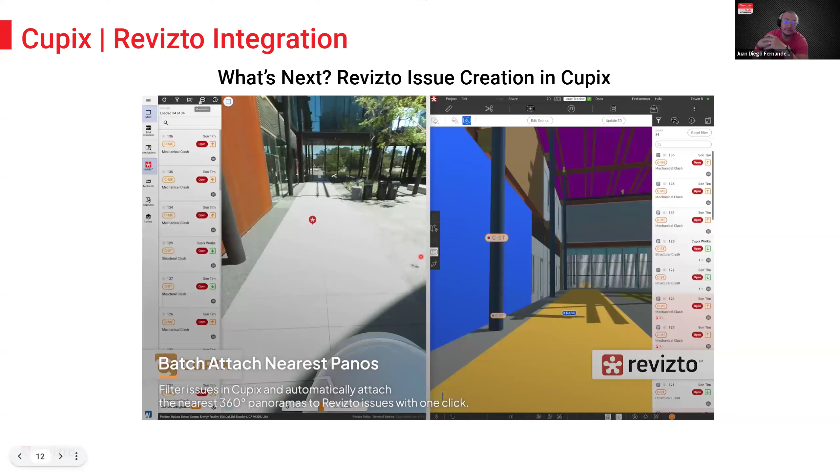What I really like about Cupix is that it offers a good solution for high-paced projects, because sometimes you don't have a lot of time just to survey data. That way, if you're just walking around with your 360 camera, that will give you a lot of information, and I feel like that's really useful. So what you're seeing here in this video is kind of like the integration that Cupix has developed.

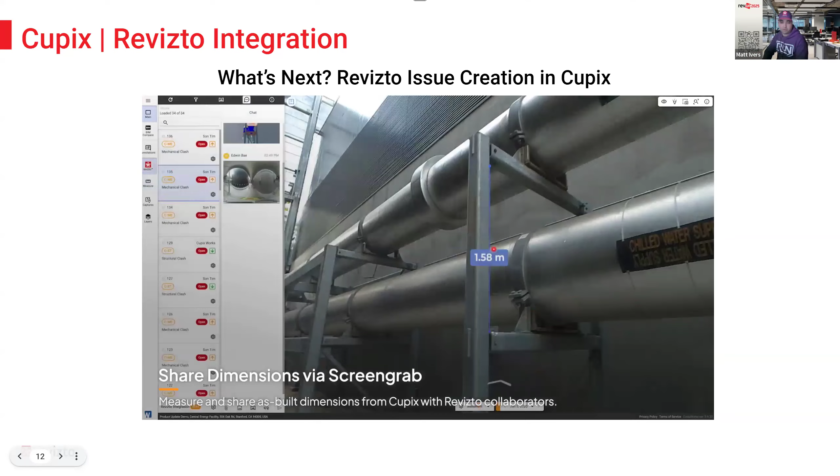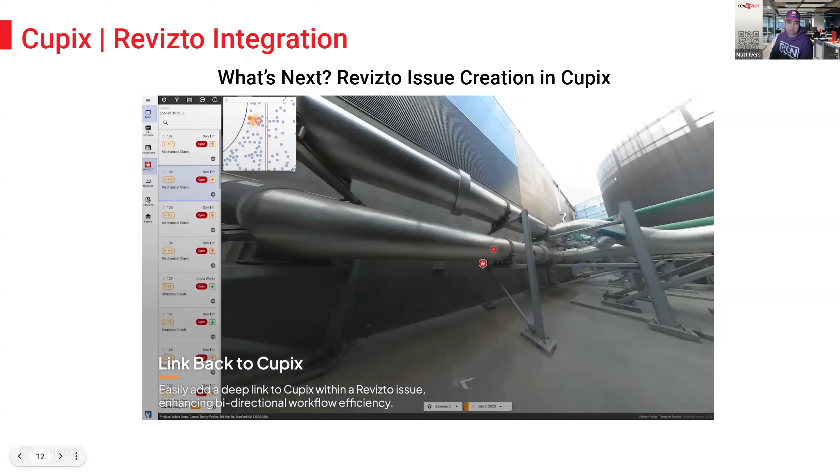Wow, these are the first people to actually develop this true integration, where you can bidirectionally create issues between either platform and sync them back and forth. So imagine being out in the field and you see a discrepancy that the VDC team didn't catch. You can communicate that data from the field right back to the office. In Revizto, a great coordination software, everyone can see the models and drawings, and now they can see the field issues instantly. Then they can comment back and send it to the field, since the field is on site documenting all this information. There's a great bridge now with that integration to basically batch attach the 360 panos of the issues right back into Revizto, so the VDC team is up to speed with what's currently going on. The collaboration is really strengthened between the office and the field.

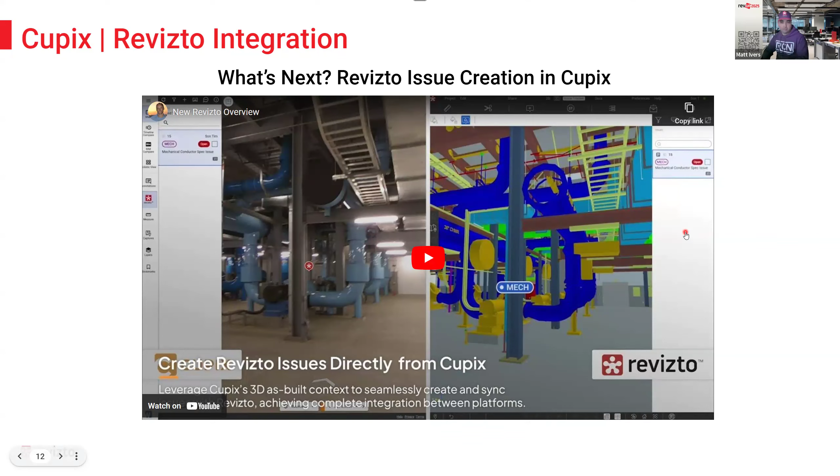Very excited. Awesome.

Moving on to photogrammetry. This has been around for a long time, so it's nothing really new, but it has gotten better at accuracy, quality, and the amount of data that can be captured. You've got companies like DroneDeploy and then DPR using a lot of their software on the processing side to really capture these massive sites. It's a really powerful tool for large site areas, for site logistics planning, excavation, and earthwork.

The main thing I want to emphasize is how relatively inexpensive it is. Anybody can use their cameras, a phone, or Matterport, but drones are really how you document those hard-to-reach areas and large areas you can't walk and capture with just a normal phone.

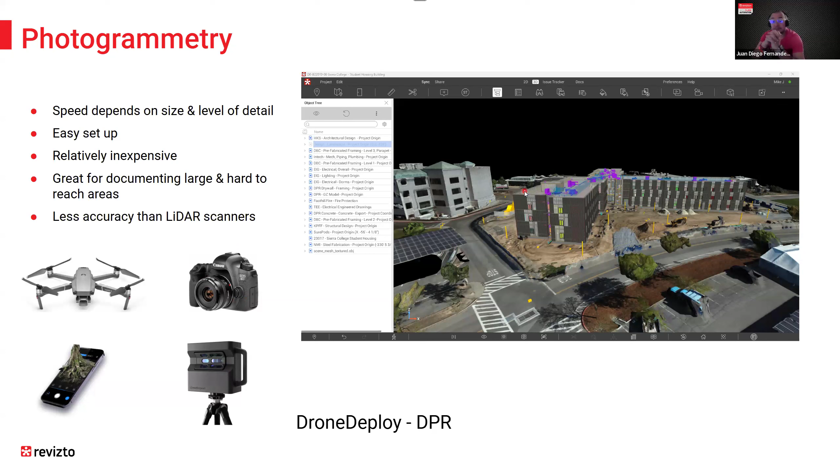What I'd add is that with photogrammetry, it's a really friendly process. All you need to do is take pictures. In the case of drones, you rely on a flight pattern, but nowadays technologies like DroneDeploy offer that based on the extent of the area you want to survey. They take that point cloud and offer a suggestion of flight pattern, so everything is pretty much solved today. That's pretty cool, it's a really nice time to live our lives now and work in this.

Yeah, everything's becoming kind of autonomous, you could say. Now they even have technology where the drone comes out of a shell, like it blooms out of a flower. You don't even need to be there, you could set that kind of like an alarm. It goes off, it opens up, it takes off, flies its pattern, and comes back and recharges. There's just too much technology to talk about, but those are huge benefits, you can't always be on site. The algorithms and the AIs are doing some serious advancements with this technology.

I just want to emphasize the quality. You could see DPR using this to verify that their trench work is correctly located, and you could see that overlaid in Revizto with the actual model, it's just a visual inspection. And then once it's been buried, or once all that pipe work is installed, you can obviously capture that too. So this is all earthwork.

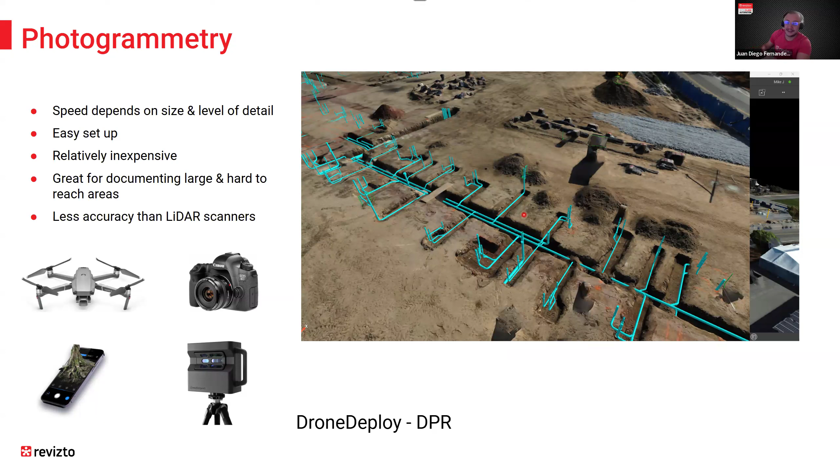Something I really like is that it's so quick, because flying the drone would take you like 10 minutes, processing that data would be another 10 minutes, and uploading that to Revizto means you can go with that information fresh out of the oven. You can start telling the operator, or whoever is managing the site, information in real time, let's say, on the field, on the site. So that's a few of the workflows that I used to do back in the day.

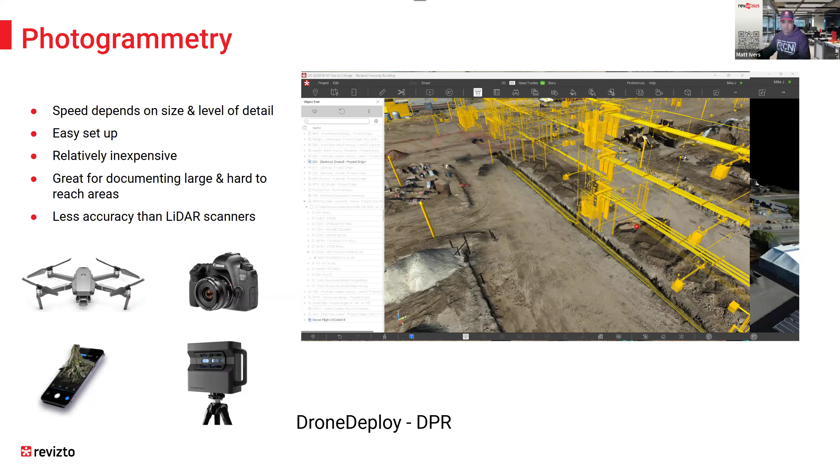This is again a lighter weight option - we're going to get into scans and laser scans, but this is photogrammetry, which is very lightweight. It's an OBJ mesh or FBX, so we can import either of those formats, and they are high quality textures that come with those meshes. It's a low price point of entry, and it works really well with a lot of software.

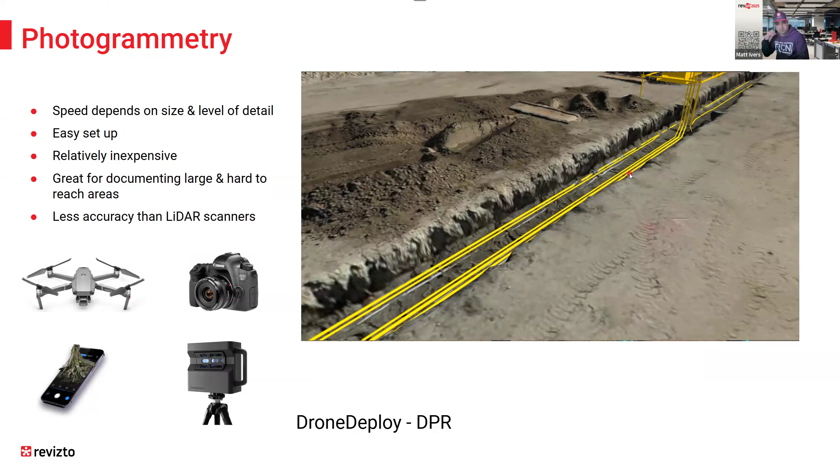Again showing that level of detail, you can kind of see that there. But this is just a fast way to capture large areas.

All right, so moving on, we're going to talk about some LiDAR scanning. This is JTM Construction, which huge shout out to JTM. They're a huge partner with Revizto, and we really like what they're doing. James and Morgan and Knight Davidson over there, huge help putting a lot of this together.

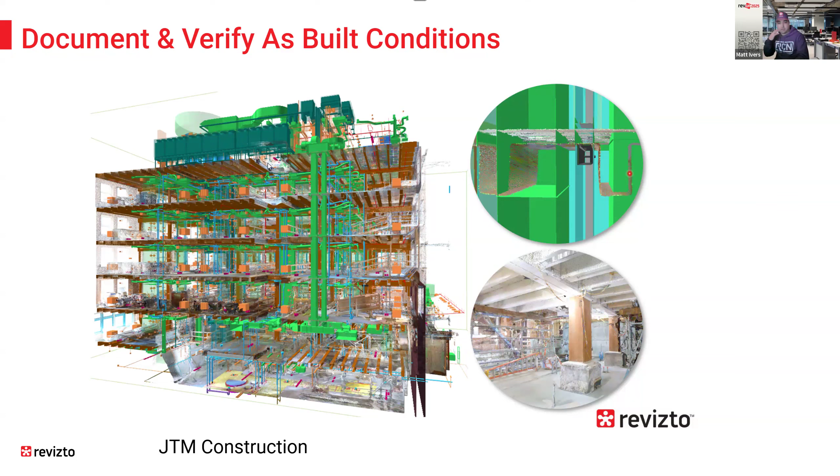They really do a great job with their surveying team and then with their VDC teams out there to capture really any of the existing spaces, any retrofit work. They also use it for a lot of pursuit work because it's very fast to be able to consolidate all that information and show it in Revizto.

So why do they do that? Obviously risk - we're trying to mitigate risk as a GC. They carry a lot of risk, so we want to make sure what we're installing is absolutely correct. We also want to verify what's existing meets the intent of what's designed. Because remember, the design team is going to design based on a lot of things, and there are assumptions that have to be made. They might not have access to the scans, so they've got to go off of older drawings. And with that, obviously, comes that margin of error.

So what you're seeing here is the design model being compared against the reality that was captured of this existing hotel in Seattle. You can clearly see where those design variances are. It's very easy to do that, mark it up, send it back to your designers, and then just confirm that, yeah, that beam is in the wrong spot. We'll update the model and then move on.

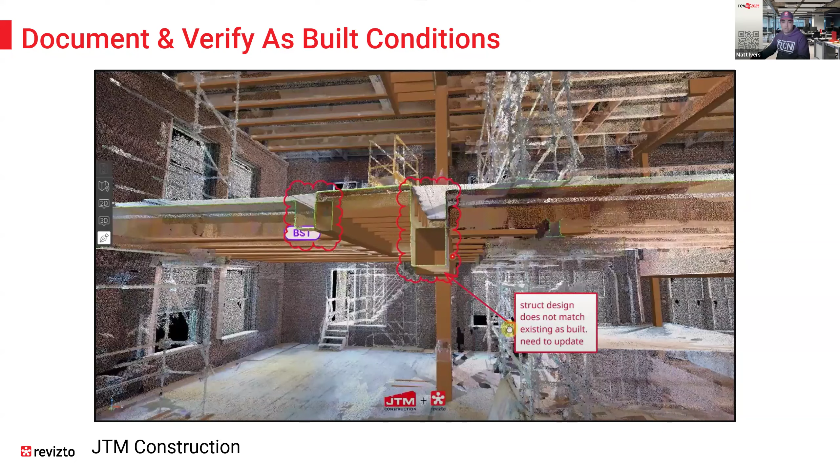Here's another example JTM did, really related to prefabrication. Prefabrication has obviously taken off too with the advancements of VDC. But it's the information of the as-built reality that we want to really emphasize here, and how that helped them with a subcontractor responsible for this work.

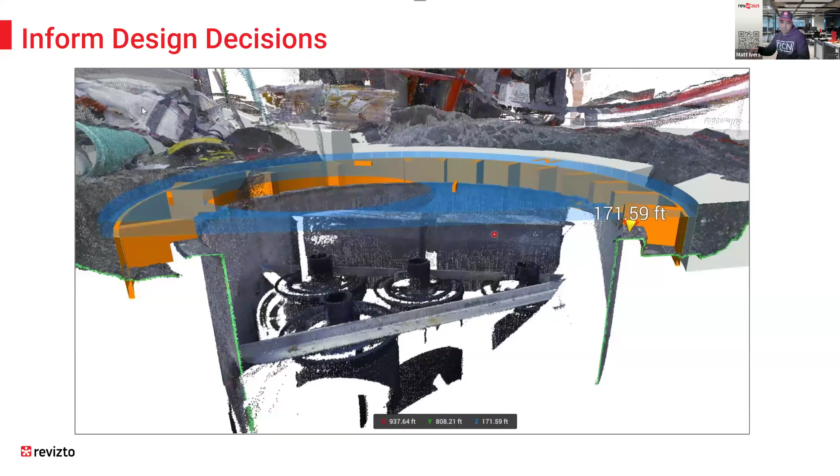I believe this was like an underground storm drain or some sort of filter system that they were trying to install, and they needed to create a custom lid to match the existing site conditions. So with Revizto and the LiDAR scanning they used here, they're able to get that with very high precision - 3 to 4 millimeter precision - verify the existing elevations and the dimensions that were required to meet that existing lid or manhole drain. And then you can kind of see that shop takes that back to their shop, works in a nice, pristine environment.

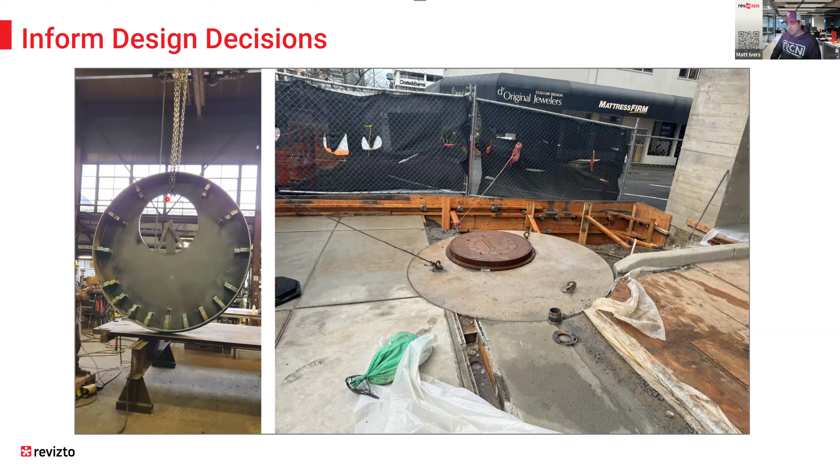This is super ideal, obviously, to be able to do all this without having to go out there with a tape measure, go back and forth to make sure it's correct. You have that assurance now up to millimeter precision, so it can fit like a glove when you install it on site.

Okay, so some of the other things that we can do in Revizto is obviously our clash automation, which is superior when it comes to clash automation with all the bells and whistles that comes with it, and then automatically assigning the clashes to the correct trades. You can see we can also do that to point clouds.

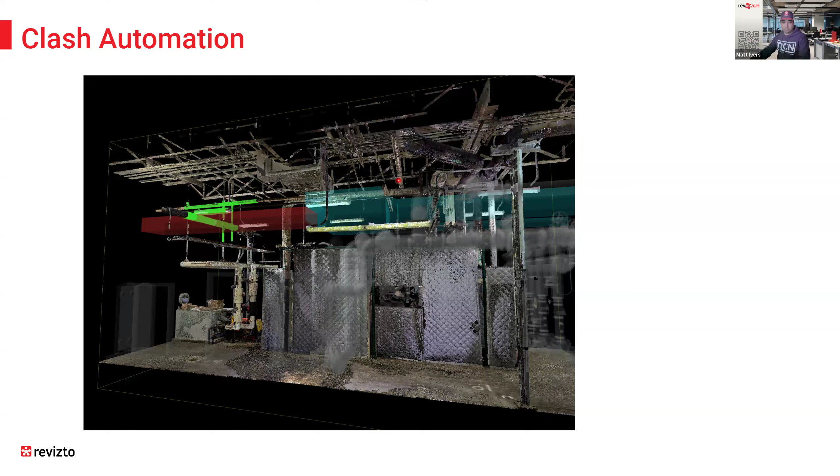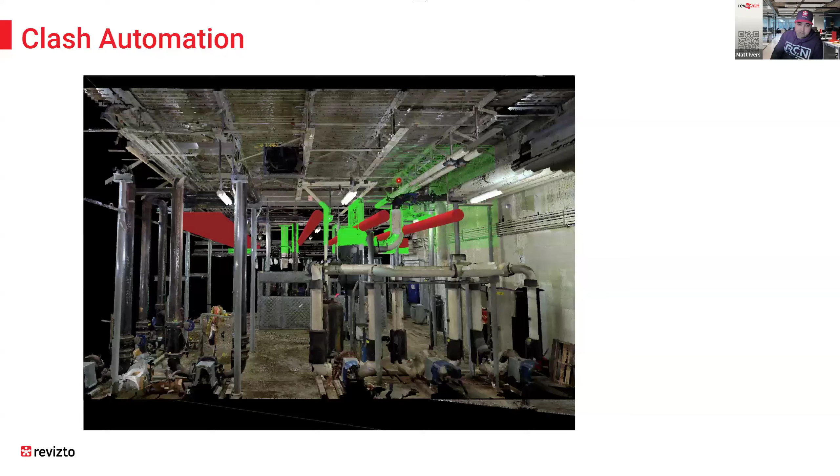So this is a scan of an existing mechanical room. You can see we can take the design model - obviously it's got to be geo-referenced to make sure it's in the right spot, which we'll cover how to do that. But once you have all that, now you can run a clash test on it, and it'll automatically figure out where the clashes are with the point cloud, highlight them, and then you can see with our advanced automation, we can assign that to the right trade very simply.

So very cool to be able to do that. And then I think this is probably the most favorited feature by the field: the ability to see all this information on your phone or on your iPad. That's never been done before. I wish I had this 10 years ago.

Yeah, this is a dream for the field because they're used to drawings. They're not going to go away from the contract, right? They have to build off of the drawings. So you're going to see that two-dimensional drawings are what they're going to use. But to have that context now enriches the data, which is what everybody wants - the data to be consolidated.

It's all over the place. So being able to integrate all the 2D, the 3D, the reality capture, and then document all the issues all in one platform - that's really where Revizto shines.

Totally agree. And in the past, I was like a real good user of Revizto. Having this kind of context on my day to day, it was like a great tool to use on the field, and that really helped out totally. And to have reality capture with your model, with your intention of design, and coordinate that data with 2D sheets - it was wow, mind blowing.

Yeah, and so we're also seeing that geolocation kind of come into play, because this was imported and it puts it exactly where it needs to go. So you know that the reality, that's reality - it's geo-referenced, it's accurate. We can trust that, so now we can back check against the model.

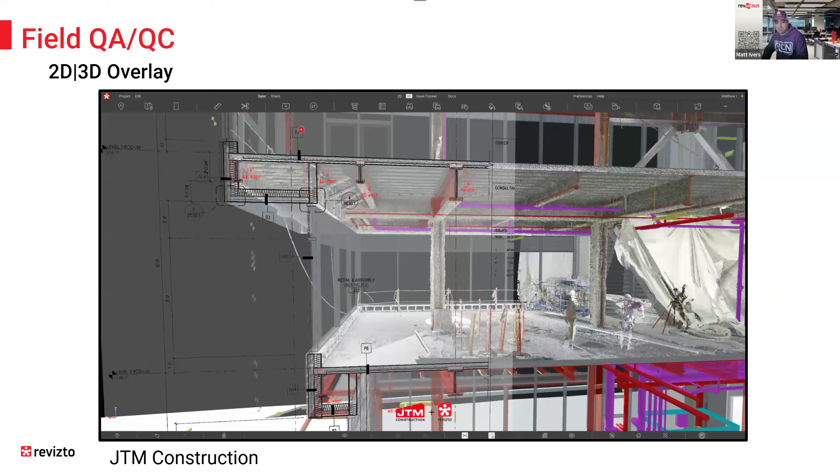So you're going to start to see these use cases kind of sprinkled throughout this presentation, but DPR again doing an excellent job out there in the field. Mike Jakes over there in Sacramento, huge shout out to him. He's using terrestrial scans, obviously, and LiDAR scans to back check the work.

This is just an example of how you can take the captured reality of what's going in on the rough-in for drywall and framing, and then overlay that with your model, color code it with an appearance template, and then use that 2D overlay feature to really see all that rich context all in one view.

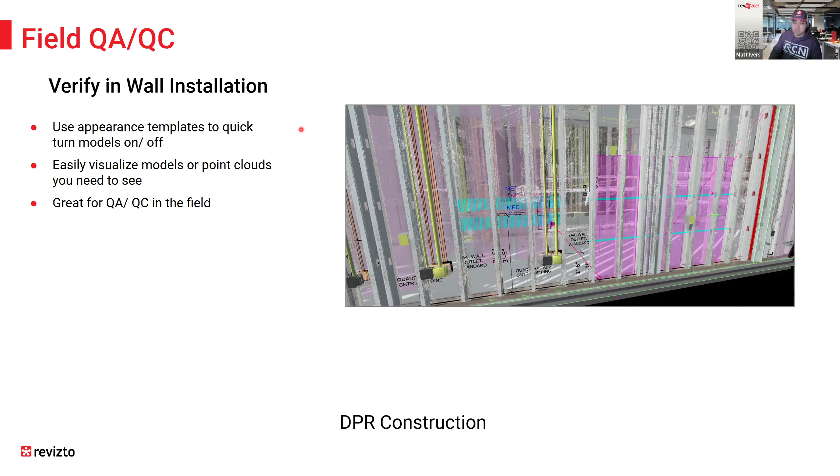Send that to your field, and then make sure you call out where there is a bust - they can easily fix it, and then the problem solves. And I am no Italian, but all I can say is bravo. It looks amazing.

And you can save these views. I mean, that's what's beautiful about Revizto - we don't expect the field to know all these bells and whistles, all the tools. There's a lot of tools. So the VDC manager really gets to do what they want.

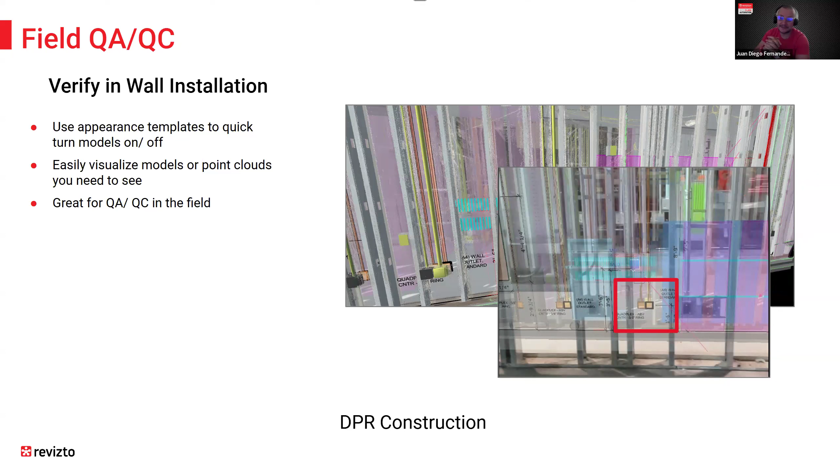They could bring it all together, make it easy button for the field to click on, and save that view. Now they click on it, they see it on their phone, and they're like, oh yeah, this is exactly the area I need to work at. It's the easy use and the ease of access. What I really like about Revizto is the ease of the optimized navigation that you get. And for general meetings, this is perfect.

Okay, so now we're going to move on to how they set up controls. There's going to be various ways to set up control, but the most common is going to be GCPs, using target GCPs, which are ground control points that are set usually with a total station.

You're going to have a total station, and a surveyor is going to use that to know exactly where that control point is in space, and it's going to have an XYZ coordinate based on your state plane, or it could be local - we'll talk about either one, because some people like local coordinates, some people like the state plane projected coordinates. But JTM is definitely using that to align their reality capture with the actual geometry of the design.

So you can see here in Revizto, we can see the 2D, the 3D models color coded with the LiDAR scan. This is using SLAM technology. This is a NavVis VLX, and you can see very easy, very mobile. It's very fast.

It's probably 10 times approximately faster than setting up a fixed terrestrial tripod scanner, which will have the highest level of precision when we looked at that pyramid structure. But the SLAM technology has advanced quite a bit with the algorithms built into it. It can create very accurate results, minimize drift, and you're getting about 4 to 10 millimeter precision based on what type of hardware and system you're using. There are obviously best practices to increase that, but it's really the turnaround time that makes this a useful tool.

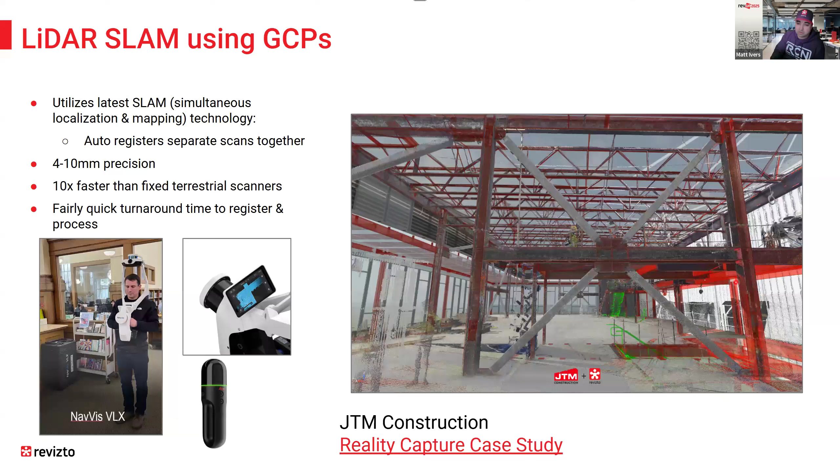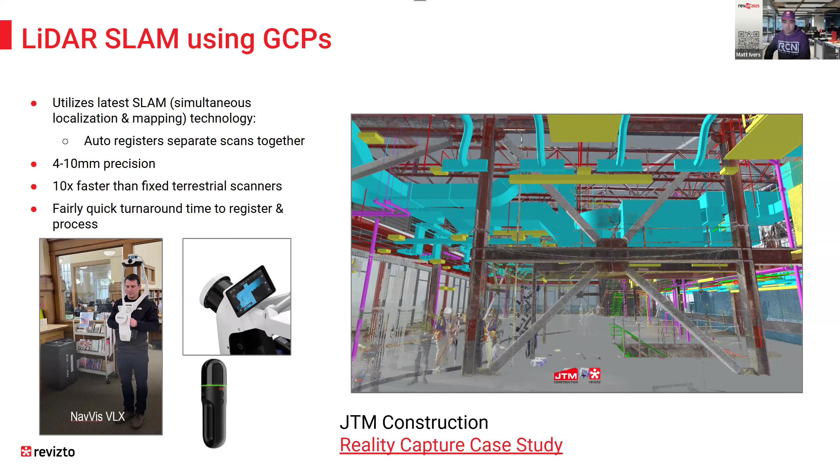You can continue to add more and more scans as you need, or unload them with our model unload and unload presets, so you don't bog down the resources on your computer. Those are just some of the things JTM's been using - appearance templates, as you can see, with a click of a button, you can turn on the MEPs and verify them color coded against the as-built conditions. There's also dimensioning and a lot of other tools in here, so really useful, and it's very accurate information.

This was the same NavVis VLX used at Oracle Innovation Labs when we were there with DroneDeploy. They scanned this in probably 15, 20 minutes, and it was amazing. I'm just showing you how stunning the reality capture is, and aligning it, georeferencing it with the models. You turn that on with your appearance template, and you can see where the discrepancies are. This is fine, that's pretty normal - we're not going to model the trusses exactly the way they fabricated them, but it's these things -

Like we can visually see that storm drain is installed in a very different location, and there's probably good reasons for that.

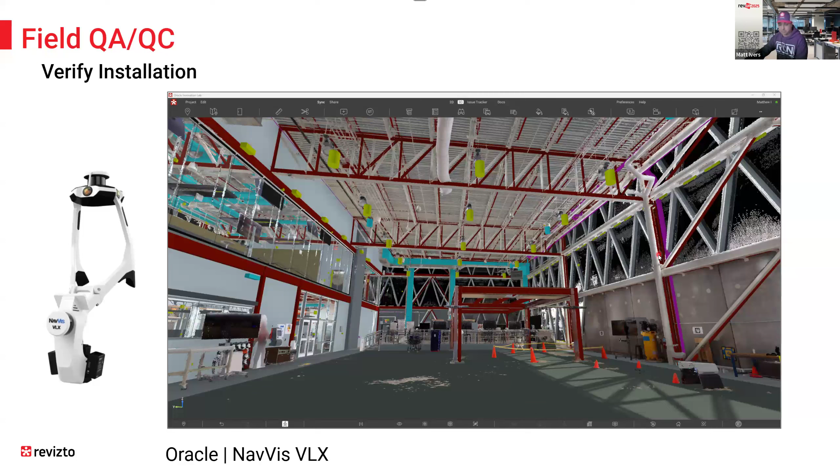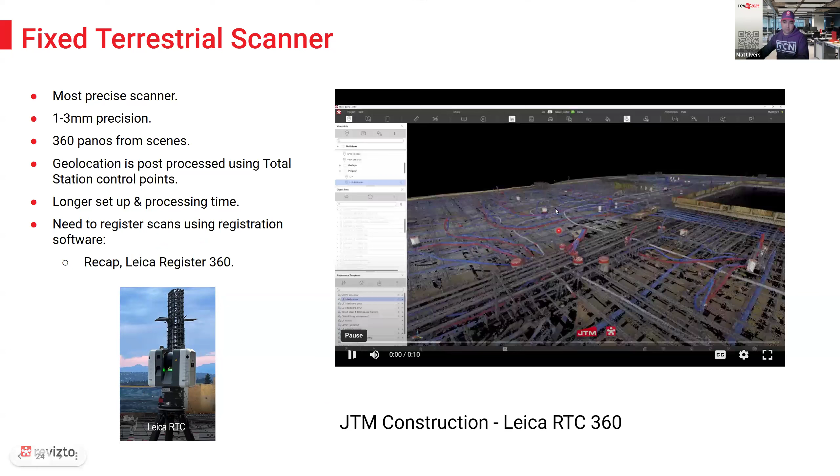Last but not least, you've got your fixed terrestrial scanners, which have the highest level of precision. They are going to be geolocated, most commonly using a total station control. It does take longer to set up and process, and you're obviously going to need registration software like Register, Cyclone, and Recap. But you can see that's the deliverable you're looking for, because this is high risk, so you want that very accurate information. Bring it into Revizto, document the discrepancies, then send them back to the field to fix. JTM does amazing work out there using both methods - like NavVis for the SLAM technology.

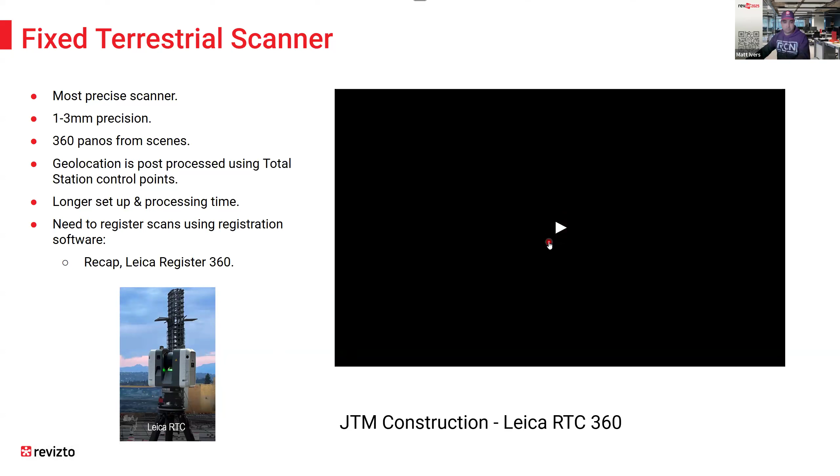So, yeah, okay, and then this is another one. This is kind of new. Gaussian splatting's been around, but it's kind of the fusion that I'm seeing now.

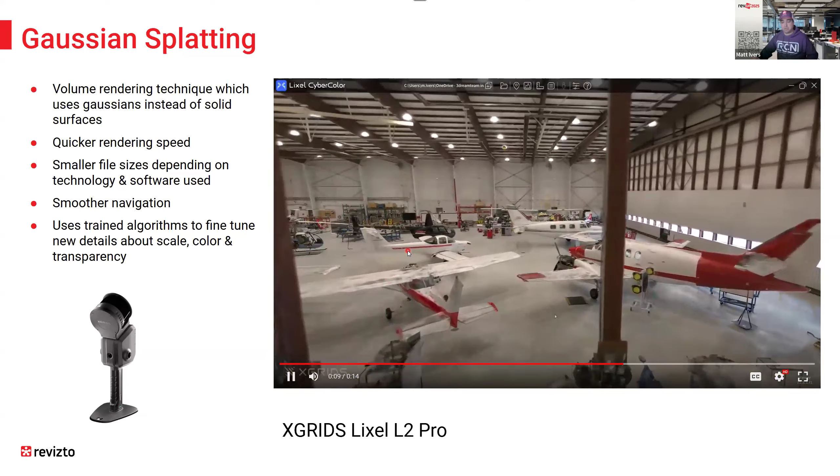XGRIDS, I met them at RCN, amazing company. They just came out with these new products, which are advancing rapidly. But look how compact that is.

You can hold that, walk around, 15 minutes I bet, to take this, get this, and it's going to create that point cloud using SLAM, which is simultaneous localization and mapping. And it's able to stitch all that information, create the point cloud, and from that point cloud they can create the Gaussian.

Which is basically a volume rendering technique. Rather than using a solid surface, it's using a Gaussian splat, so it kind of creates that fuzziness, but that helps fill in those gaps, which is different than typical photogrammetry. It's more rough and surface oriented.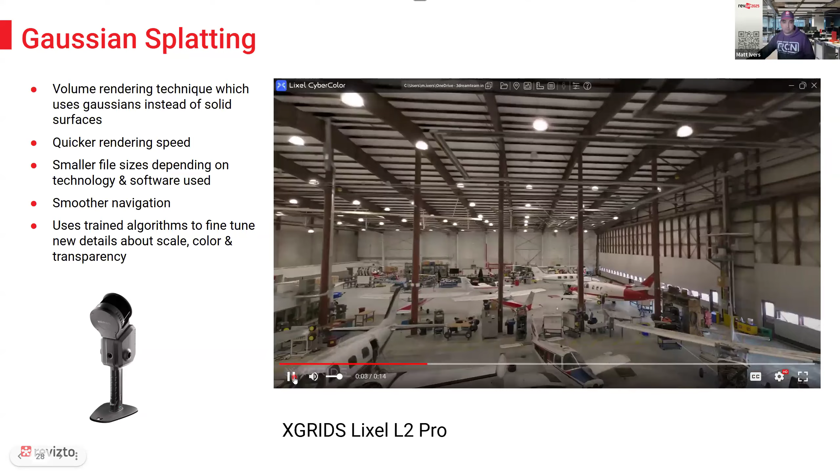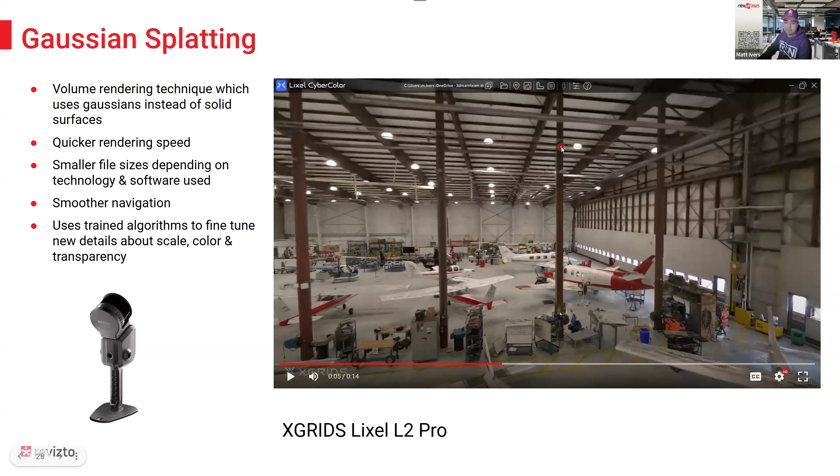You can kind of see the Gaussian here. It's fused with a laser scan, a LiDAR scan point cloud, and so it's filling in the gap, creating a more smooth transition. So it gives it that realistic feel. Impressive technology.

Okay, and then I think this is one of the last ones, just how compact everything's getting. So everyone's got these phones. But what we haven't seen is RTK, which Juan's going to go really into depth on. But imagine being able to scan with your LiDAR on your phone.

So you would need a LiDAR scanner, or your advanced phones, iPhones, are going to have those sensors on them with your camera, which have obviously improved drastically in the last 10 years. You're not going to get the incredible accuracy or range, because your LiDAR on your phone is probably only good for 5 meters, maybe.

But with RTK, you can actually geolocate that in real time, which is amazing. What I really like is that this new technology really opens up the whole reality capture in real time.

So if you have a really busy surveying team that you rely on, and you want to anticipate their task and absorb a little bit, these are ways that you could survey pretty simple information and have that information as reference. So you just need to upload into Revizto, and you can have that as a really good as-built asset in the future. So that's really good.

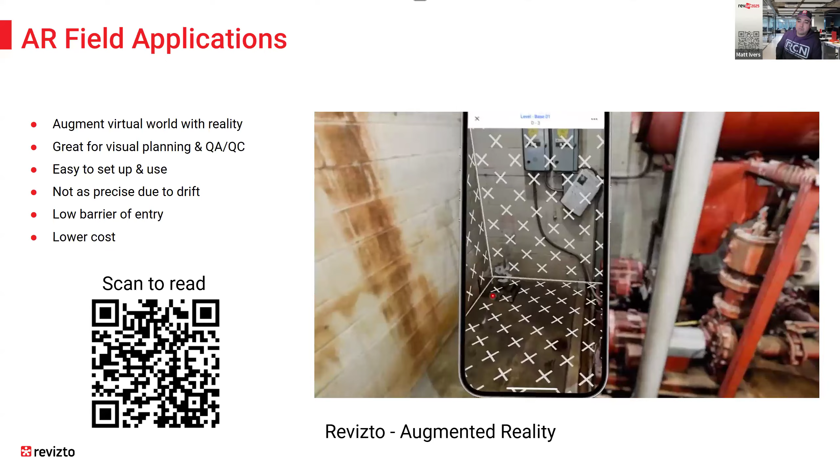All right, so last but not least, definitely wanted to highlight the new AR. So there's a lot of AR for sure out there, but we wanted to make sure you guys were aware of augmented reality and being able to take the model and overlay that with your phone based on the real world. You could see that's basically now located and positioned to match the exact location in the field.

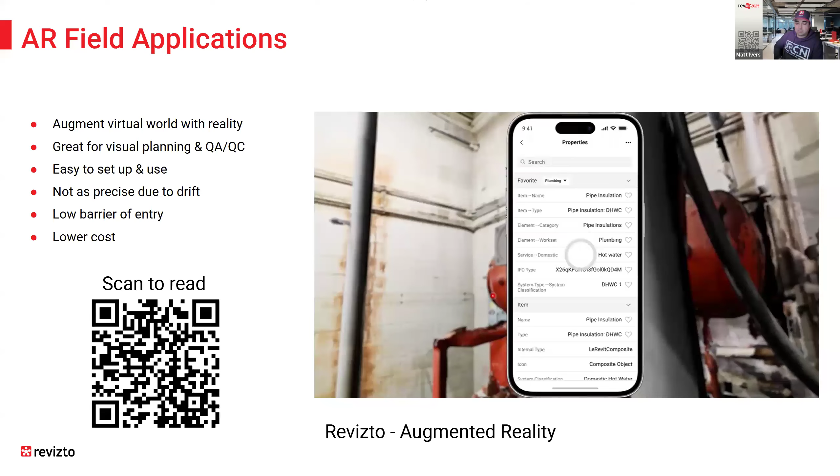Just superimposing your model using your phone over reality is really what augmented reality using our Revizto site app allows you to do, which is super powerful for anybody quickly trying to see if there are any discrepancies, or for facility managers that might want to compare existing conditions against the actual planned design. And something that it's really useful for is that if you are capturing point clouds and stuff that's underneath or not visible, you can use AR just to see those elements.

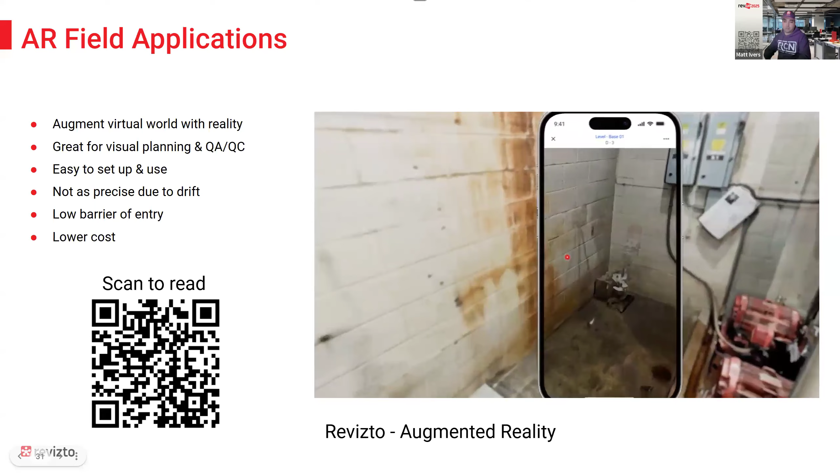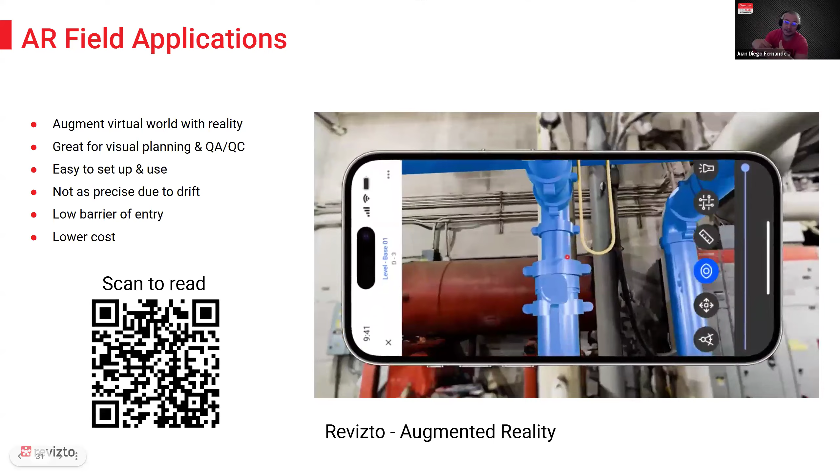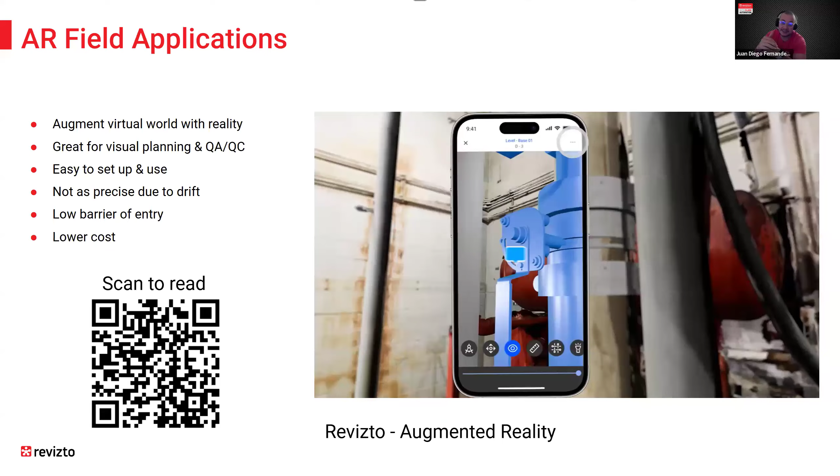For facility management and operations, like if you need to do a renovation and you want to incorporate a different structure, and you need to see what's in this wall, if there are any systems buried underground or something like that, that will really help. And Revizto is one of the few AR options where you can see that type of information, like point clouds and OBJs within AR.

It's good. I'm really glad you mentioned that, because that is one thing that most people forget, is what happens when that scan is, or when that deck is poured.

How are you going to be able to visually see it? So with augmented reality, you can now see that point cloud virtually, overlay that with your phone, and now you can pretty much see through really whatever you want - the walls, what's behind the wall - and compare that against reality.

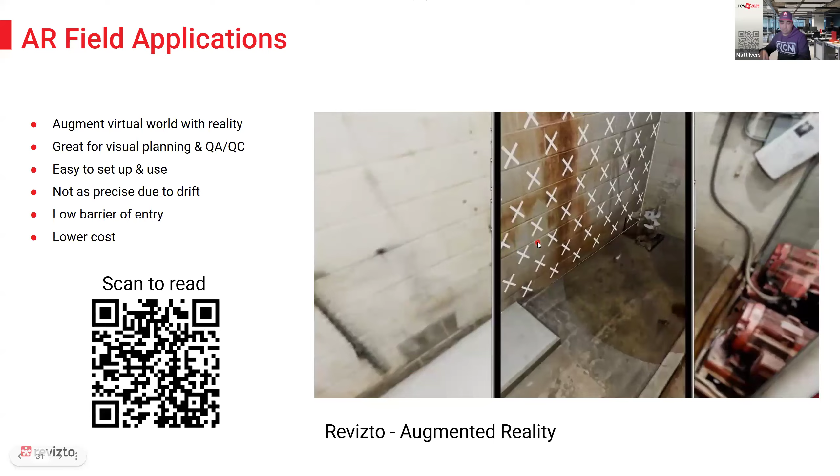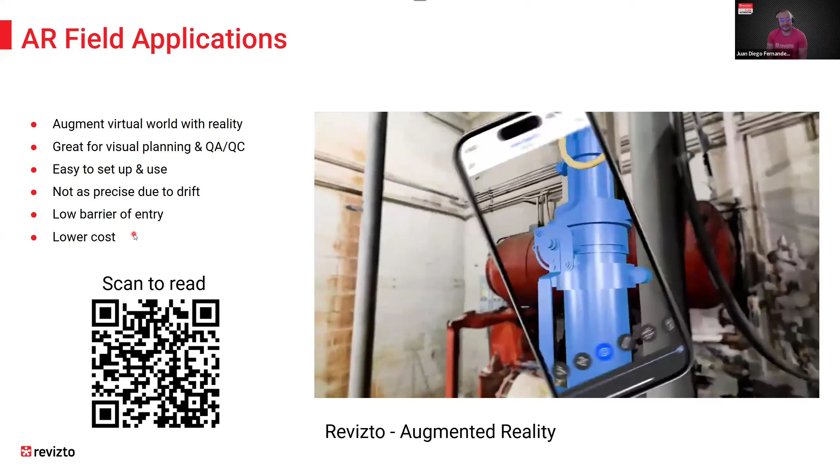And it's going to be available to anyone because pretty much everyone has a phone, right? You really don't want to drill into an LPG pipe or a water pipe. That's not good.

So now let's talk about your reference and coordinate system. This is really complex, so I'll try to narrow it down to explain the main concept. Basically, what you need to know is that we live on an ellipsoid, not a perfect sphere. The curvature of the Earth might change depending on where you are on the planet. But our projects don't extend far enough for you to need to consider Earth's curvature, so what we do is use a projected system.

Let me draw a little bit here. As you can see on the planet, we use what we call the WGS 84 coordinate system, which relies on degrees, minutes, and seconds. You will see these lines, which are latitude and longitude, and they generate squares. As you get closer to the equator, these squares will be closer to a square shape, so there will be less distortion on your plane. That's one thing you need to know.

When you get close to the poles, the shape will be more like a triangle, so the distortion will be most visible. Here's the exact example of Antarctica - when you see it on a map it looks huge, but in real life it's not that big.

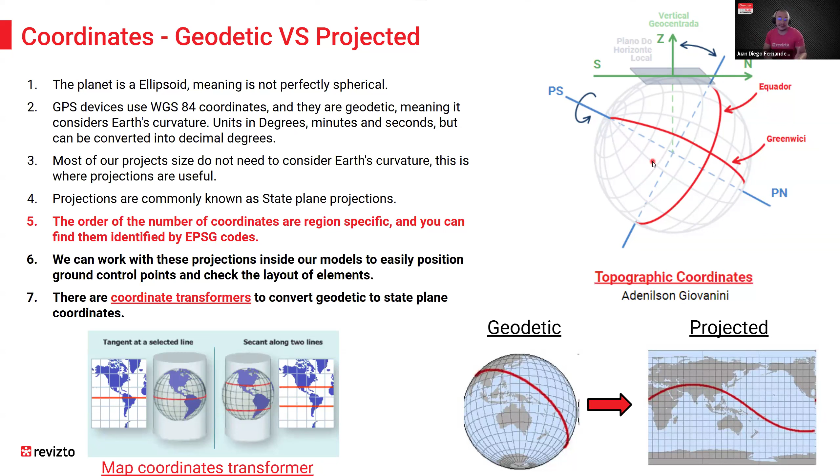I would also recommend checking your local regulations, because usually that's standardized by law - for example, municipalities or counties need to use the same coordinate system in order to do urban planning or service lines like water lines in those systems. That's why it's so important to work in that coordinate system. I hope that pretty much covers it.

Now, how can you use those coordinates? Basically, we have three main methods. We'll start with total stations, which is an optic method - equipment that relies on optics. What you do is start with monuments. And where are those monuments placed at?

Something I really admire about the US is that you guys have everything really well organized, your public information. In this case, you'll see the NOAA website, and they have this information so you'll be able to see where the main monuments are for referencing your project. You could start by placing your total station here, and you can move and transform that point over there to georeference your project. If you click on each monument, you'll see metadata, pictures around it, and the coordinates of each one. That's pretty cool to know.

After that, you have GNSS triangulation, or GPS. It depends on what kind of satellite systems you're connecting to, but basically it works by triangulating your position with satellites. You'll see this in 2D, but basically it's in 3D, since satellites are orbiting the Earth. You connect and triangulate that position. The more satellites you get, the less error there will be, or it will be more accurate. So that's what you need to know.

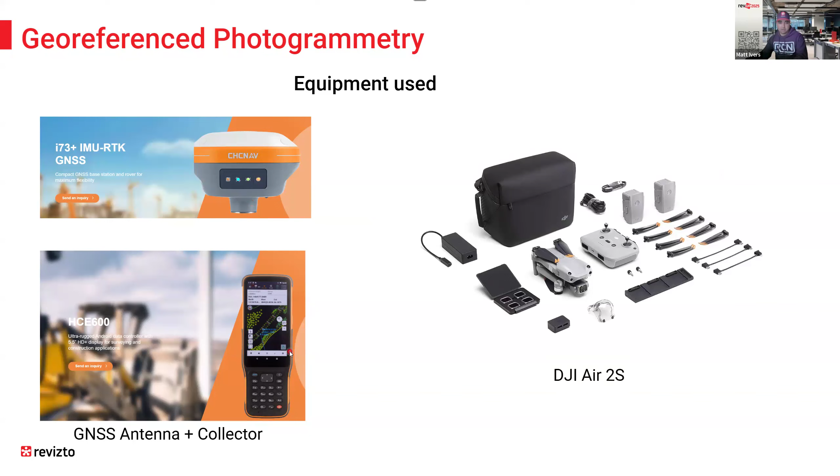This is the receiver that Juan was using - this would be the rover, and this is the data collector. Basically what we did, we did a drone flight around a property, and we used RTK with an NTRIP type of base connection in order to record the GCPs.

On this process, real quick: check your parameters. There are ellipsoid type of parameters you need to be aware of because the drone uses WGS84, and we want to get those GCP coordinates in that type of coordinate. Also just check your satellite connection - that's pretty useful to do. As you can see, there's a lot of GPS, GLONASS, Galileo type of satellite systems.

You would also need to check or wait for your base to triangulate. In this case, as you can see here, we started with a real big error margin, and we narrowed it down to 2 centimeters, which was useful for this case.

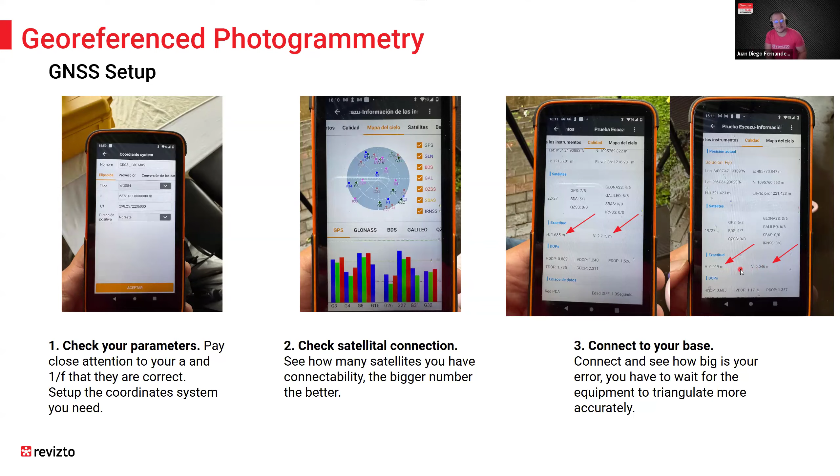Go over to the next one. Now you would check where you are placed, because each collector has a Google Maps interface, so it's pretty easy to know where you're placed and confirm all the parameters were input correctly.

Something really useful is that you can see in real time your error of reading, and if you are fixed - if you're having any type of connection problem, that will be noticeable here. Also, we recommend that when you start surveying, use codes. That's really useful for filtering out all that information you are surveying day to day, and it makes it easy to make reports. So that's how we use codes for GCP - that's good to know.

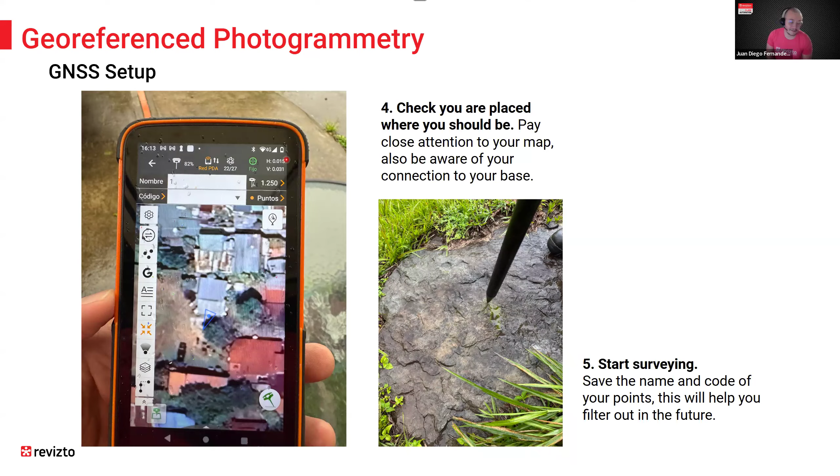So what do you do when you get that data collected? That's going to be your controls. Juan, with that rover with GNSS, was able to collect and position those control points. There are, I believe, 3 control points he staked out on site in various locations. This was in Costa Rica - it used just one state plane coordinate system that they use, an EPSG code.

Is that right, Juan?

We are so small that we only have one coordinate system. Pura vida. Pura vida.

So here's the photos he took, about 188, I believe. For photogrammetry software, there's a number of them out there. I used Reality Capture by Epic Games. They do an awesome job.

We translate those from WGS84 geodetic to state plane coordinate system, the actual region that Juan lives in. And then you can reconstruct it.

But before you do that, you want to tell it what those targets are, and take that control point. So we import the CSV file from his data collector, which has all those coordinates: longitude, latitude, and altitude. We map that to those controls through the CSV import, and then we can tell the software where those targets are located. It's going to say that GCP is now mapped to that control.

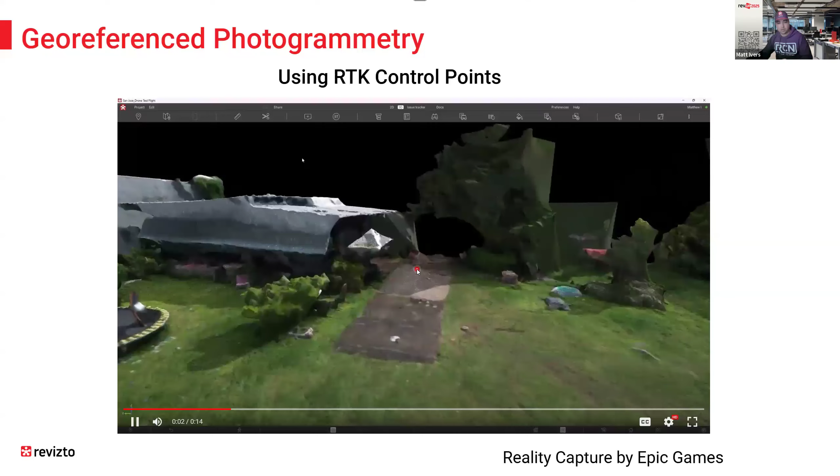You can see it's very easy. This is a point cloud, and it also includes the OBJ mesh, the textured mesh, separate from the point cloud. You can kind of see what that quality looks like. Super easy to do.

Now, what if you're using LiDAR with an RTK type of workflow for reality capture? In this case, we're showing a use case with a Matrice 300, which is a DJI drone that has a built-in RTK antenna. That way you can connect to a base, or you could connect either way. Those are the two options. I would recommend having your own antenna.

And with the Zenmuse L2, which is just one LiDAR sensor, now we can show the results because that's really good equipment. It's more costly, but it's going to deliver more information and be easier to post process.

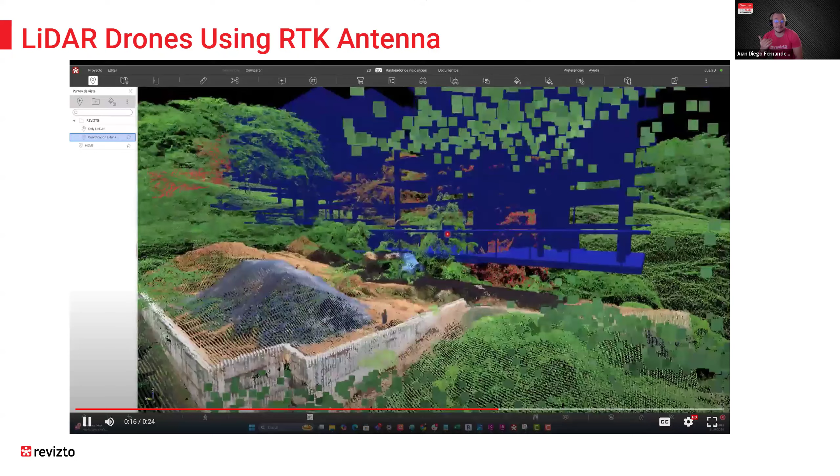In this case, we're showing all the survey data that the drone captured. It was geo-referenced, so all we needed to do was drop that inside Revizto, and it was pretty easy. Something I really liked about this project is that we had those red trees, which means the trees that were meant to be cut down. That way we could verify what type of implications you have with those trees, even when doing earthwork and stuff like that, and even help with the planning of the project.

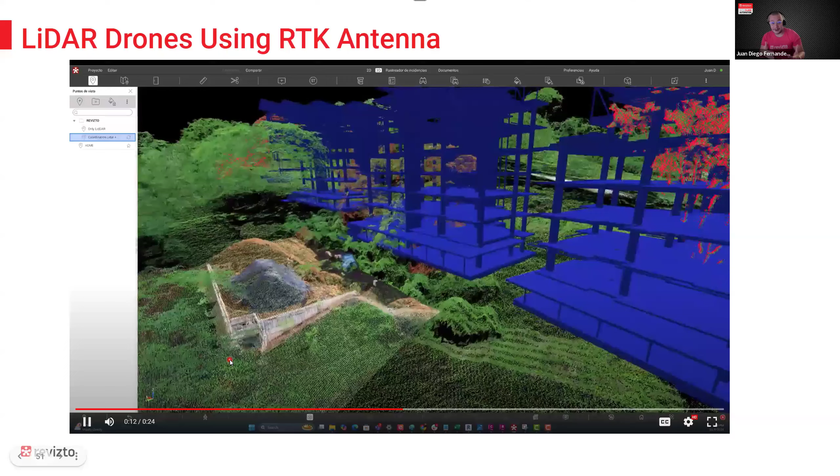So as you can see, reality capture brings a lot of options and new workflows for how you can consume that information to plan better in your project. We also have that one example using just photogrammetry. So you can combine different types of reality capture inside your project, which is something I really like to do.

So I'll cover this one. This is SLAM technology, which we were looking at on a drone. But there are also other ones you can do just on the ground, more terrestrial, ground-based workflows. Same concept, where the RTK module is integrated into the SLAM technology, a mobile solution, a handheld device. What you're seeing is the mobility and the ease of access.

What's cool about this is not only are you getting a high density point cloud using LiDAR sensors, which is shooting millions of points—we'll see in a second how that works, it's really cool—but it's actually able to geolocate and position the scan in real time. So RTK, real time kinematics, is allowing that scan to register or auto-register, geolocating it in real time. Very fascinating and very efficient workflow for sure.

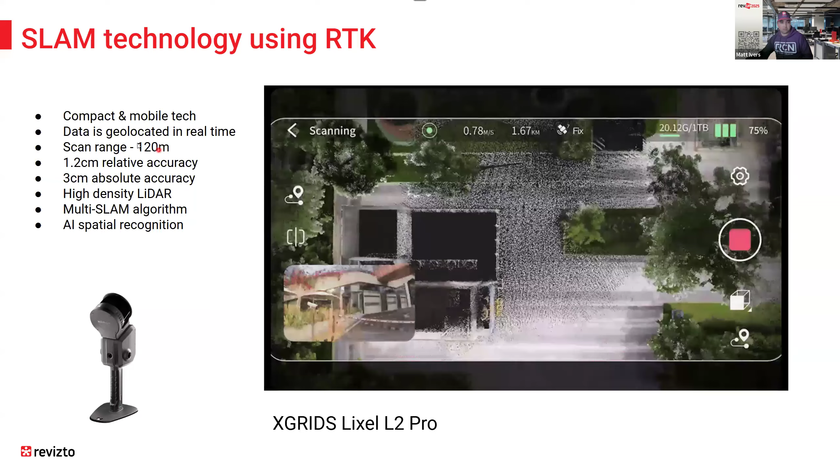And the range, that's something I wanted to mention with this. You can see the range is very high. You can get lower cost options that have lower range, but this one's able to scan 120 meters and get very high density with very good absolute accuracy. You can see there.

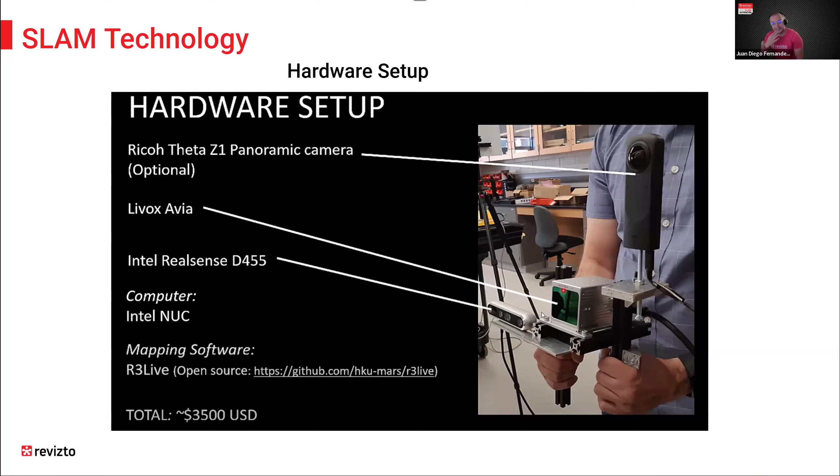So this is a really good DIY lidar scanner that you could do. If you go to the next one, you'll see it in real time because the lidar sensor uses this type of pattern -- I believe this is like a globe type pattern. So what it does is locate each point where the laser bounces off the element it's hitting. The depth sensor facilitates the registration, and with the 360 camera, you can see when it's moving closer to certain elements, it colorizes that, and that's happening in real time. That's something I really like about this -- the technology is getting way better, more powerful.

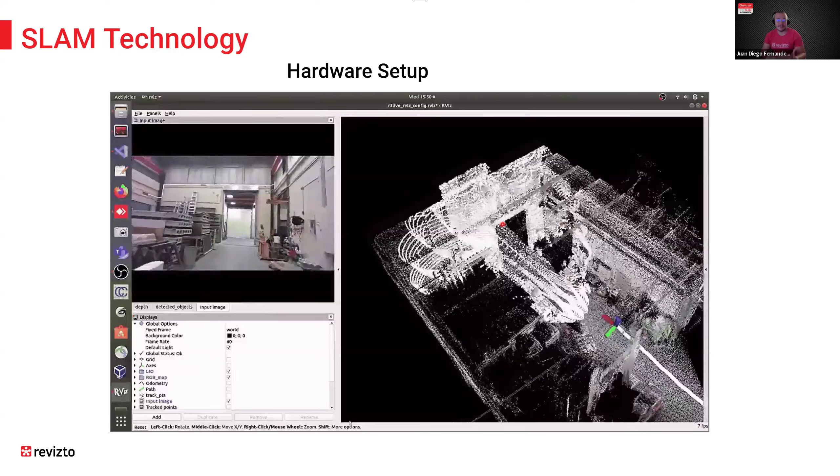So that's something you don't want, especially if you're doing this, and since you don't have the ability to do manual registration with those types of scans, that's where the software and algorithms need to do better. That's why we recommend starting with companies where you can try out their technologies, because they trust their algorithms and they will get better over time, so the drift will be minimal and you can have more accuracy in those processes.

All right, so last but not least, we'll finish out and close with the best practices. Juan, if you can take the total station...

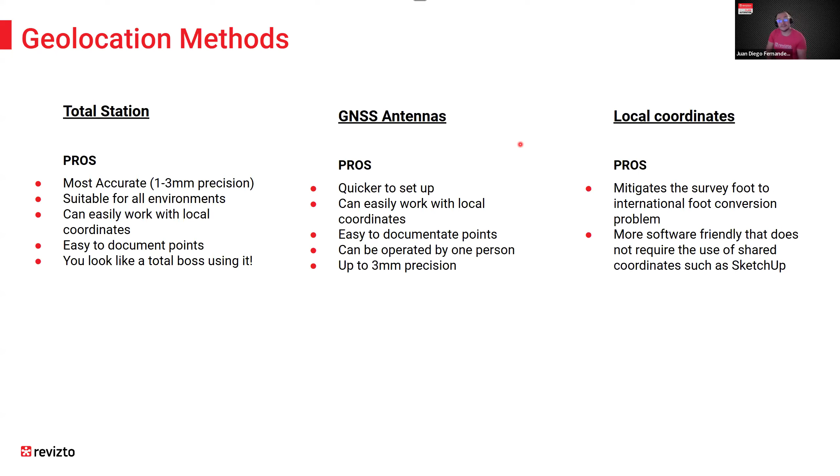For terrestrial scanners, I would say have your control points laid out before scanning. Try to build a perimeter because you don't want people going near your equipment while scanning. You don't want vibrations. Be aware of high reflection elements such as glazing and steel paints or metal paints that might cause problems.

Plan ahead your locations in order to get the most coverage of scanning in the least amount of scans. Try to use higher elevations to get more information with just one scan. And if possible, try to upload a DWG file into your collector in order to see that everything is aligned.

For SLAM, use control points to increase accuracy and geo-reference that scan. Use closed loops to ensure that you get really good coverage.

Try to work smooth. The equipment has compensators and motors for that, but if you can help out the equipment, that will be good. Try to move slower in order to get more detailed information, as you can see that's an iteration of information it's collecting.